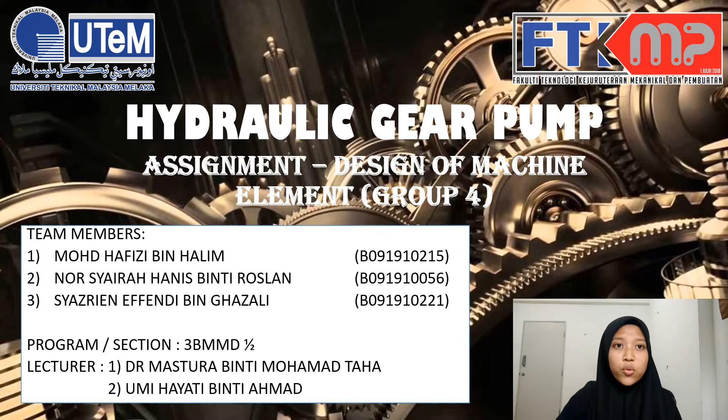First of all, let me introduce myself and my teammates. My name is Nor Syairah Hanis binti Roslan and my teammates Muhammad Hafizi bin Halim and Syazrien Effendi bin Ghazali from Group 4. Now, we would like to present our assignment entitled Hydraulic Gear Pump.

Okay, first of all, let me introduce what is a gear pump. A gear pump uses the meshing of gears to pump fluid by displacement. Gear pumps are also widely used in chemical installations to pump high viscosity fluids. Gear pumps are positive displacement or fixed displacement, meaning they pump a constant amount of fluid for each revolution.

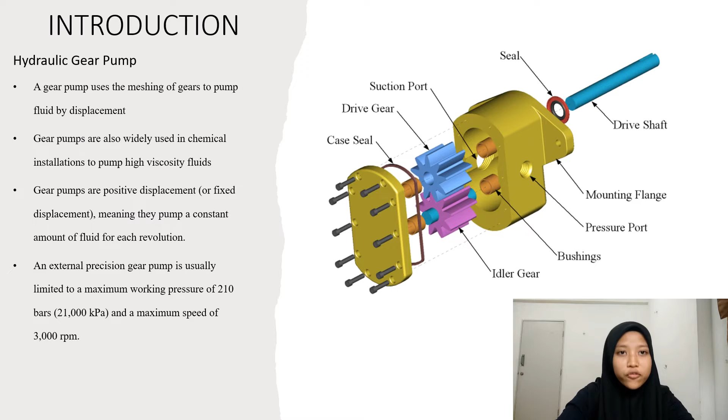Then, an external precision gear pump is usually limited to a maximum working pressure of 210 bars, which is 21,000 kPa, and a maximum speed of 3,000 rpm. There are two main variations of gear pumps: external gear pumps, which use two external spur gears, and internal gear pumps, which use an external and internal spur gear.

Then the applications of the gear pump are as follows: petrochemicals, which is pure and filled bitumen, pitch, diesel oil, crude oil, lube oil, and so on. Then for the chemicals, which is sodium silicate, acids, plastics, mixed chemicals, isocyanates, and so on. Next, paint and ink, resins and adhesive.

For the pulp and paper, which is acid, soap, lye, black liquor, kaolin, lime, latex, sludge, and many more. Lastly, for food, which is chocolate, cocoa butter, fillers, sugar, vegetable fats and oil, molasses, and animal foods.

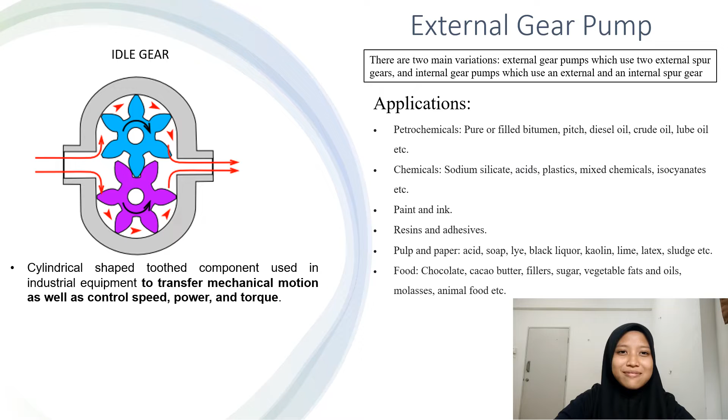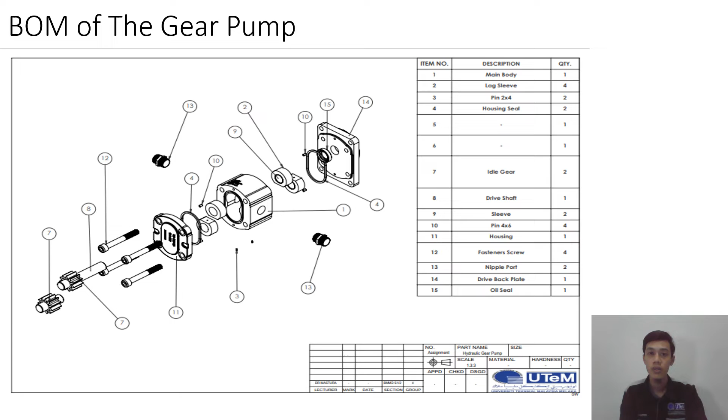This is the bill of material for our product, which is the gear pump. It consists of 15 parts, which are the main body, lag sleeve, small pin, housing seal, idle gear, drive shaft, sleeve, big pin, housing, fastener screw, nipple port, drive back plate, and oil seal. This is the exploded view of the gear pump.

Next, these are the elements of the hydraulic gear pump. We choose three elements, which are drive shaft, fastener screw, and idle gear. First, the drive shaft is a pump drive shaft which rotates the mechanism, extends slightly beyond the mounting base through the pump housing. By means of a drive coupling, torque from the driving unit is delivered to the pump drive shaft.

Second, a fastener screw is a hardware device that mechanically connects or affixes two or more things together. Lastly, the idle gear in an internal gear pump is the driven gear, rotated by the rotor which is the driver gear.

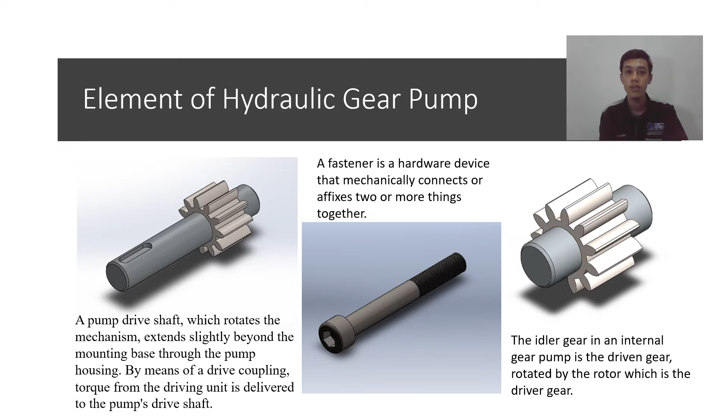Now it's my turn to explain about the FEA analysis, which is to identify the failure of the gear, which is the idle gear. This is the type of the failure of the gear. Number one is the missing tooth gear, number two is the chipped tooth gear, and the last one is the worn tooth gear.

Considering the factors involved in gear material, design, manufacture, and also service life, the ability to properly assess a gear failure is a valuable tool in identifying the root cause of the problem and implementing corrective action to prevent early failure or to extend the gear life. So for this failure, we only focus on the tooth bending fatigue, which is the most common mode of failure in gearing and results from cracking under repeated stress below the ultimate tensile strength of the gear.

The fatigue life also can be extended by maximizing the ultimate tensile strength of the material. Next, maximizing the residual compressive stress in the case also improves the fatigue life. And the last one, this also can be achieved by using a low carbon content and by shot peening after heat treatment. So for these 4 points, we only focus on the material of the gear, which can reduce the cracking of the gear.

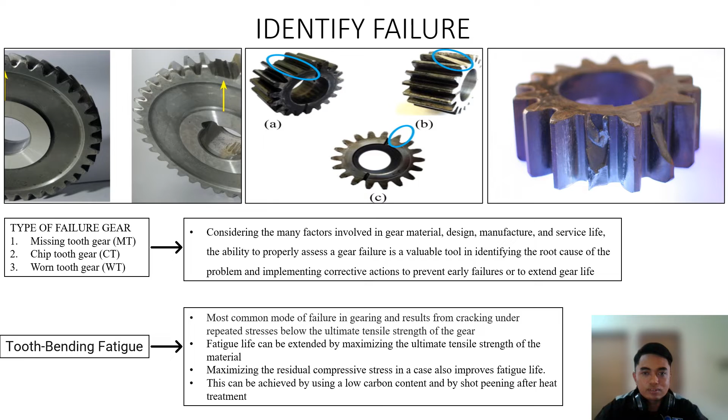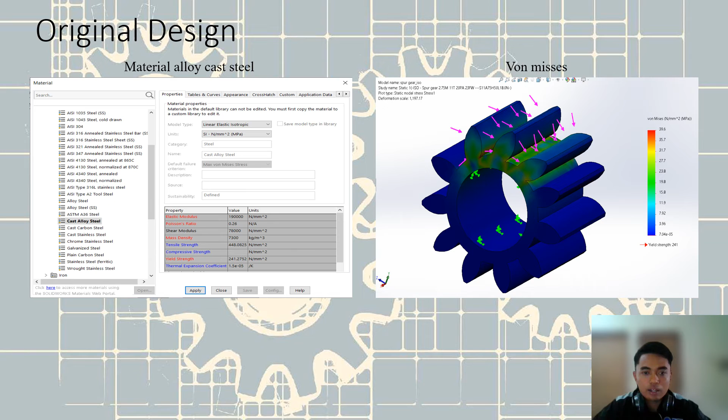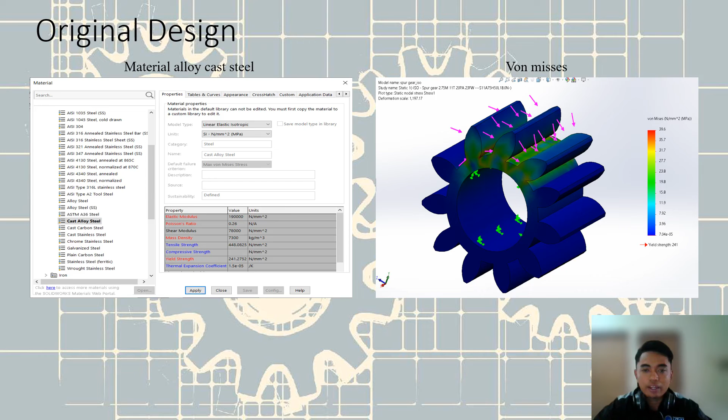Now for the FEA analysis of the tooth bending fatigue, for the original design, we choose the material which is alloy cast steel, and the tensile strength is 448 Newton per millimeter square. As you can see, the result is the von Mises stress of the gear, which is 39.6 megapascal, which is higher. And the displacement is 0.00304 millimeter, and the last one, the strain, is 0.000141. This is the original design of the gear before improvement.

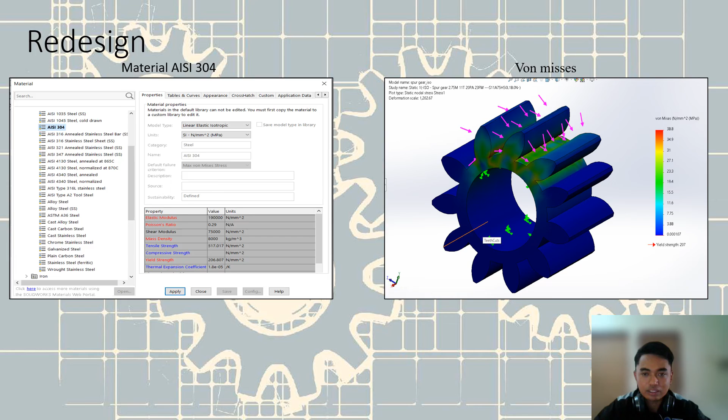So for the redesigned gear, we only change the material of the gear, which is AISI 304, whose tensile strength is higher than the alloy cast steel, which is 517 Newton per millimeter square. So the result for the FEA analysis, we can see the stress or the von Mises is only 38.8 megapascal. Continue with the displacement of the gear, which is 0.00303. The last one is the strain, which is the value of 0.000143.

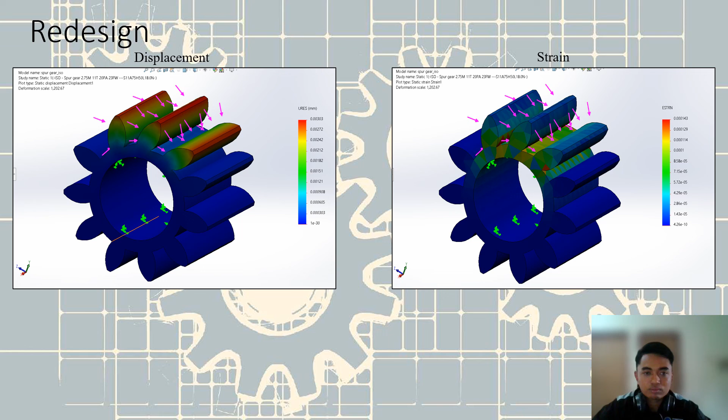So by changing the material of the gear, we can see a difference between the value of the stress, the displacement, and also the strain. After redesigning the gear, we can conclude that by using the FEA analysis, we can avoid the failure from occurring in the system. It is important for us to understand the function of using the finite element analysis and apply it to daily life for a better future.